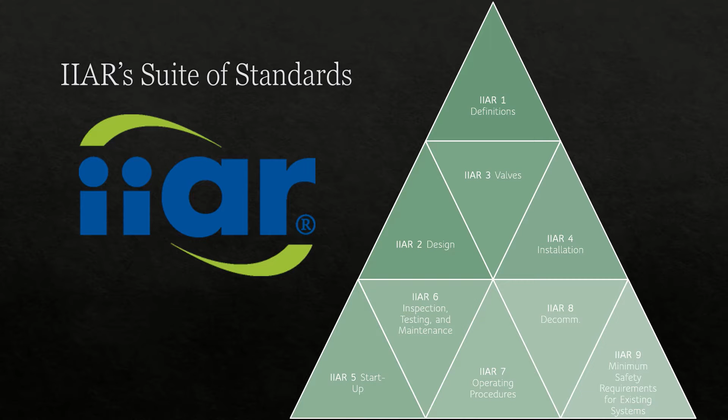The title of Standard 9 is Standard for Minimum System Safety Requirements for Existing Closed-Circuit Ammonia Refrigeration Systems. Like all other IIAR standards, Standard 9 was published to address a specific need in our industry.

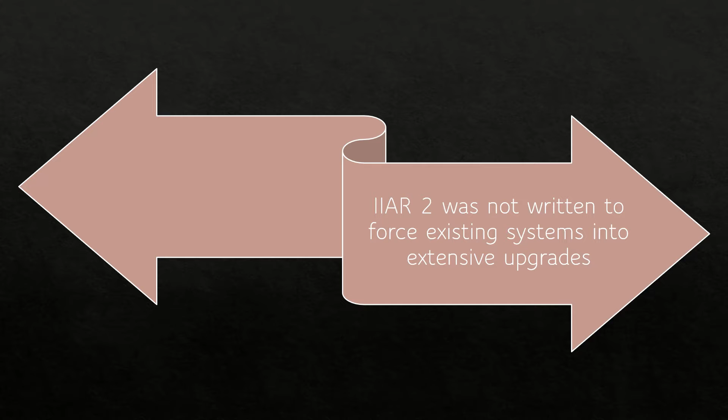The motivation for writing a standard for existing systems was twofold. On the one hand, we wanted to prevent IIAR's design standard, Standard 2, from being used as a regulatory weapon against systems built before that standard was published.

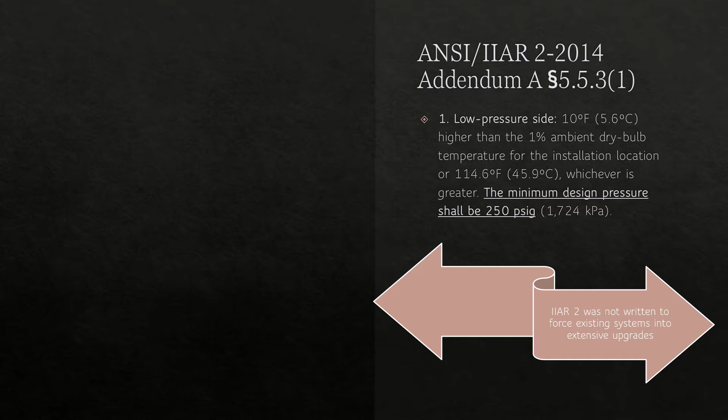For example, the 2014 version of IIAR Standard 2 increased the minimum allowable design pressure of the low side of a system to 250 psi. However, many systems designed prior to that date utilized low side components that were designed for 150 psi. While it was never IIAR's intent that Standard 2 be used to forcibly require extensive upgrades to existing systems, many such instances have occurred.

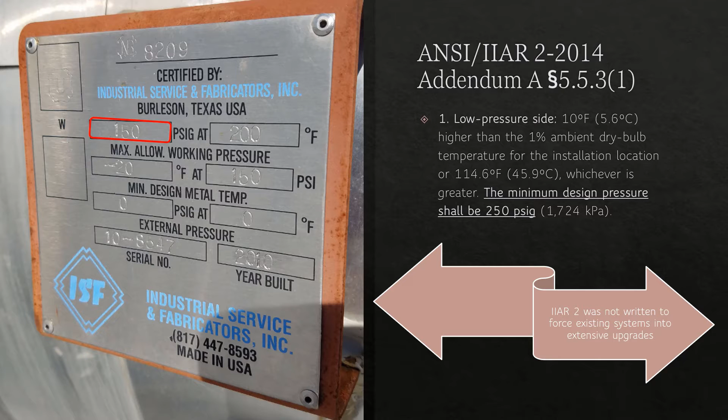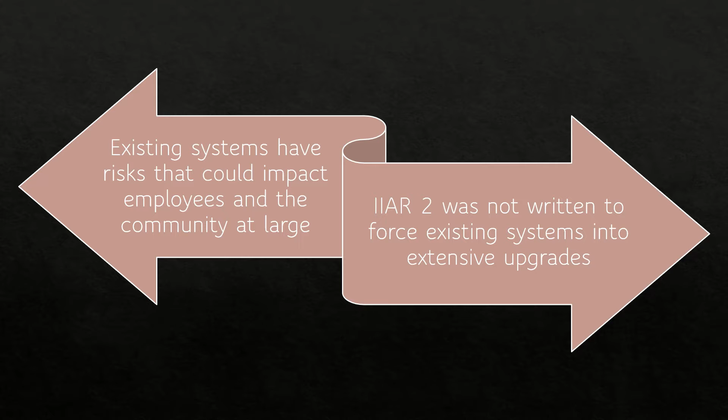On the other hand, as an industry, we acknowledge that existing systems do contain risks that may affect employees and the community at large. In other words, it's unacceptable to use old age as an excuse for doing nothing. IIAR Standard 9 was written to address the tension held by these two perspectives.

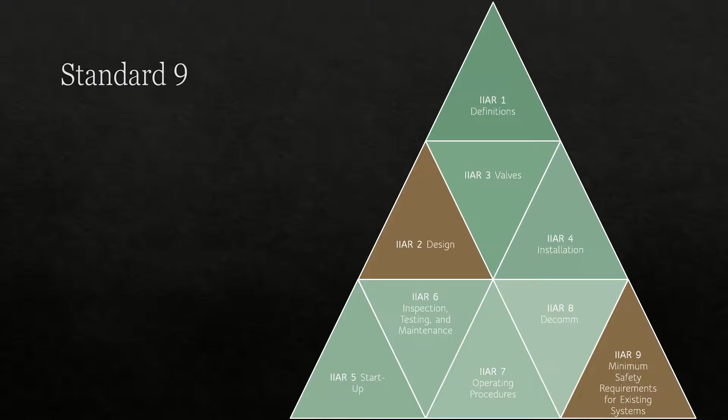A simple way to think about Standard 9 is as a less stringent version of IIAR Standard 2. Standard 9 contains 8 normative chapters and 6 appendices. The normative chapters establish minimum requirements for existing systems and use words such as must and shall. These chapters are intended to be mandatory. The appendices are informational and contain non-mandatory content that complements the normative chapters.

Chapter 7 is titled Minimum System Safety Requirements Applicable to All Systems and contains most of the requirements for existing systems. The biggest implication of this standard is in Chapter 8, which requires systems to be evaluated against the minimum requirements of Chapter 7 within 3 years from the date of publication. Appendix E provides an evaluation template that can be used if desired.

Now I'd like to take a closer look at the details in Standard 9. We'll examine the content in Chapters 1 through 6 and Appendices B, C, and F. While that may appear to be a lot of information, you'll see shortly that these sections contain a relatively small amount of content.

Chapter 1 establishes the purpose and scope of Standard 9. Section 1.1 succinctly states that the purpose of the document is to provide the minimum safety requirements for existing closed-circuit ammonia refrigeration systems. The key word in that sentence is existing. This standard is not applicable to the design or installation of new systems.

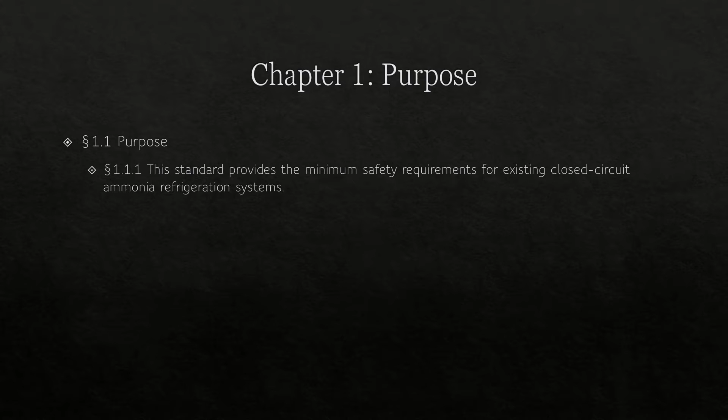Section 1.2.1 summarizes the scope of Standard 9 as providing a method to determine if existing systems comply with the minimum system safety requirements of the standard. Chapter 8 and Appendix E are wholly devoted to this subject of minimum system safety evaluations, so we'll table this topic for now and address it in a later training.

Additionally, the scope of Standard 9 is to provide a method to determine and document that existing equipment designed and constructed in accordance with codes, standards, or practices that are no longer in general use is inspected, tested, maintained, and operating in a safe manner. In other words, IIAR 9 provides a method for our industry to demonstrate compliance with the process safety information requirement in the PSM, RMP, and CalARP regulations.

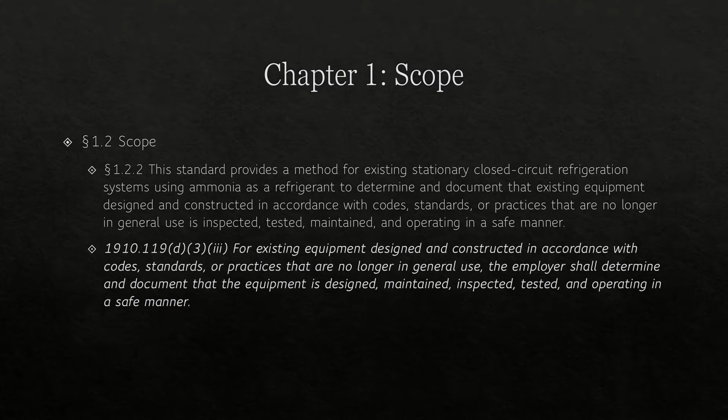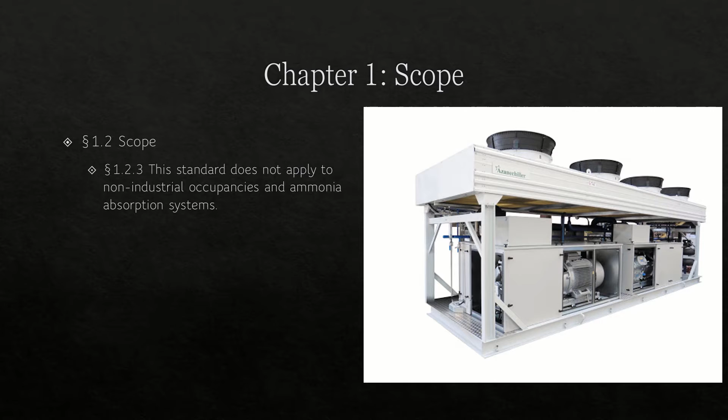Standard 9 is not applicable to equipment in non-industrial occupancies, such as low-charge systems that are now being used in the commercial sector. Additionally, this standard does not apply to ammonia absorption systems.

Chapter 2 is titled Definitions and directs the reader to IIAR Standard 1, which is titled Definitions and Terminology Used in IIAR Standards. The only new definition introduced in Chapter 2 is Risk Ranking Method. But since that definition relates to minimum system safety evaluation methodology, we'll wait to examine it until Chapter 8.

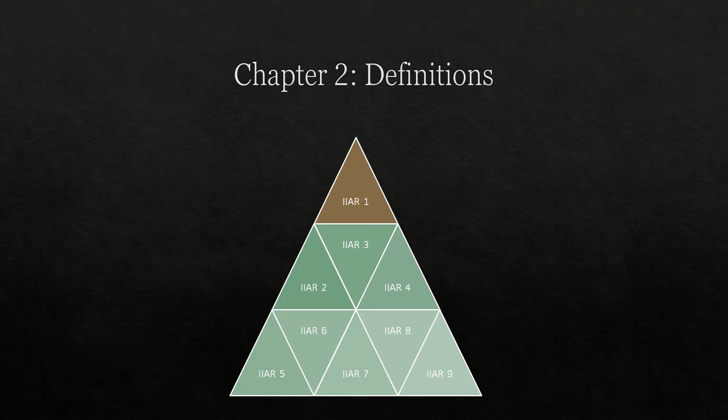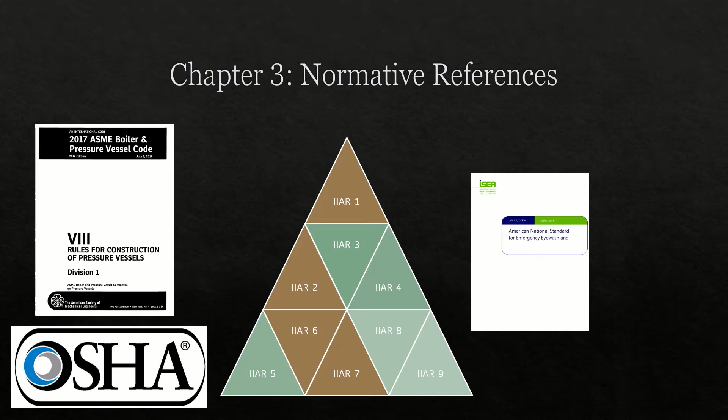Chapter 3 lists the normative references that are part of Standard 9. The documents listed are the ASME Boiler and Pressure Vessel Code Section 8, OSHA's regulations relating to machine guarding, IIAR Standards 1, 2, 6, and 7, the International Safety Equipment Association Standard for Emergency Eyewash and Shower Equipment, and NFPA Standard 704.

Chapter 4 clarifies the minimum requirements for equipment and system documentation. The required documentation is divided into 3 categories: manufacturer data reports, materials of construction, and manufacturer documentation for system components.

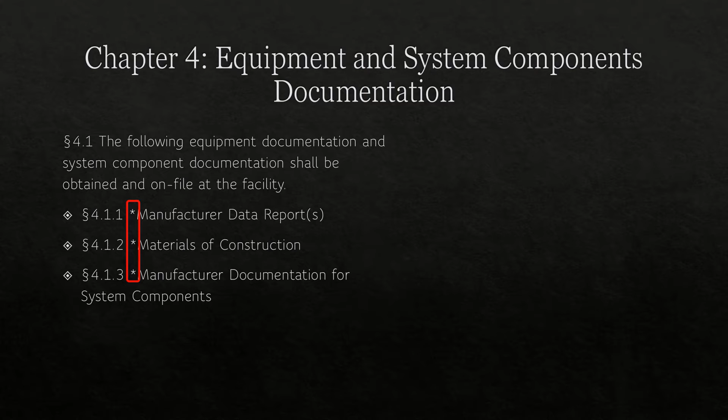You probably noticed the asterisk in each of the 3 categories. Whenever you see an asterisk in this standard, it means there is additional explanatory material regarding that section in Appendix A.

This slide displays the explanatory material for section 4.1.2 regarding materials of construction documentation. As you can see, the first paragraph explains what materials of construction documentation is and even provides a list of common types of materials of construction documents.

The final paragraph has an interesting statement regarding Appendix C. It states that Appendix C provides a listing of additional equipment system component documentation that is not required by this standard to be obtained to demonstrate compliance.

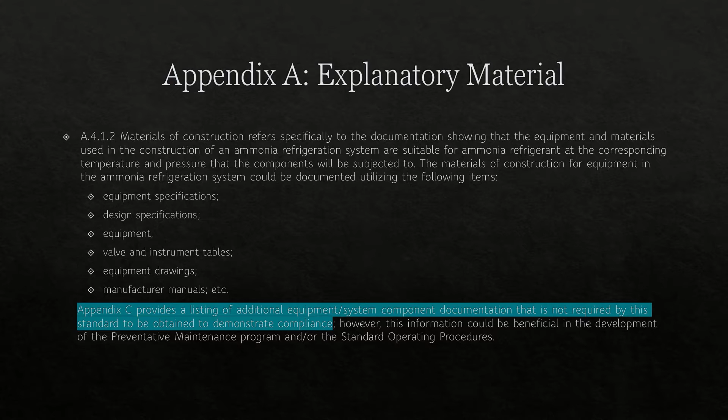Appendix C is located near the end of the document and provides even more background material regarding documentation. The paragraph introducing Appendix C is intentional in clarifying that the appendix is not mandatory. This is true for all the appendices in Standard 9.

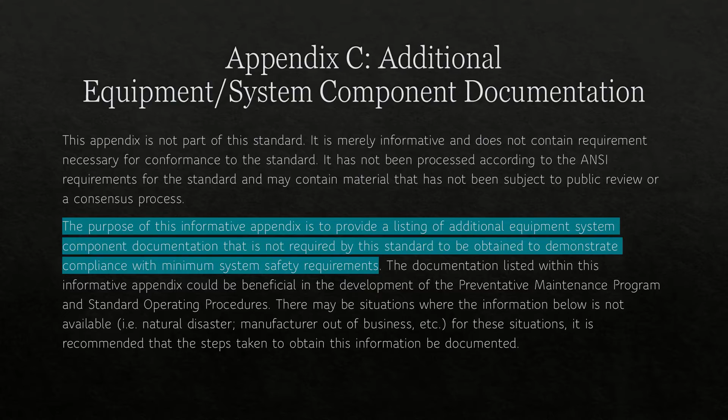The first sentence of the second paragraph explains that the purpose of Appendix C is to provide a listing of equipment documentation that is not required to comply with the standard, but may be beneficial in developing other regulatory documents. The appendix continues by providing a myriad of examples of such documents.

Appendix B is titled Equipment System Component Documentation and serves a very similar purpose as Appendix C. Like Appendix C, Appendix B is merely informative.

Appendix B uses a similar sentence as Appendix C to state that the purpose of the appendix is to list documents that are not mandatory to comply with Standard 9, but are required to demonstrate compliance with other regulatory requirements.

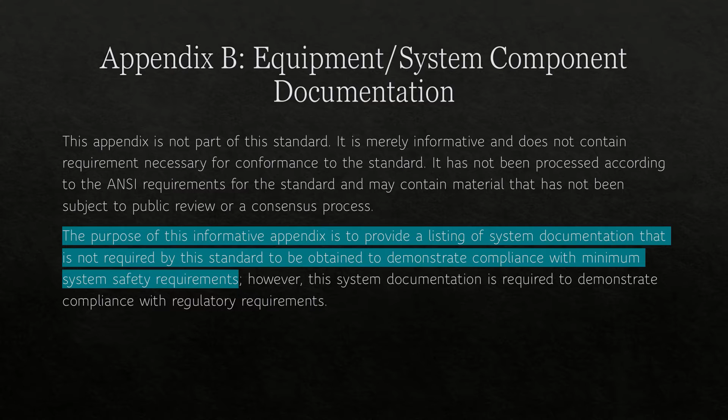Appendix B concludes by listing 10 documents which are required in the RMP, PSM, and CalARP regulations as part of process safety information.

Chapters 5 and 6 are incredibly brief, consisting of 1 sentence each. Chapter 5 requires that equipment and system components be inspected, tested, and maintained in accordance with IIAR's ITM standard, Standard 6.

An interesting nuance of this section is that 5.1 seemingly requires existing systems to comply with Standard 6 immediately, whereas Section 4.1.3 of Standard 6 states that the standard is voluntary until adopted by the authority having jurisdiction or when adopted by the owner, whichever comes first.

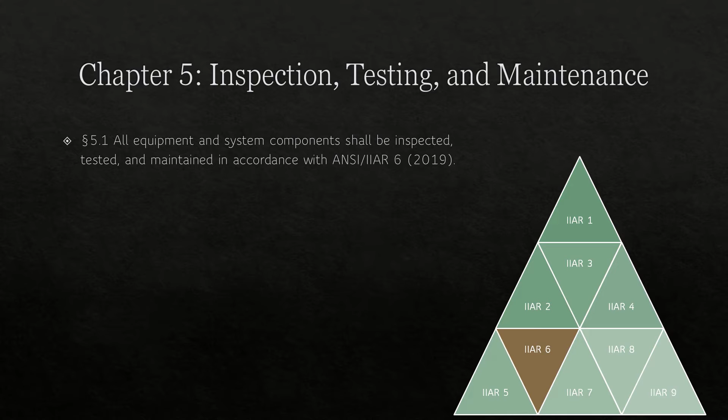We'll have to wait and see how this subtle difference plays out. Chapter 6 requires that existing systems develop operating procedures that comply with IIAR Standard 7.

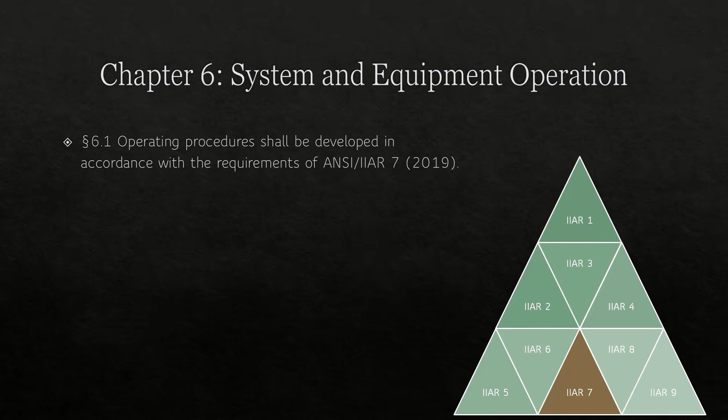Now I'd like to jump ahead and look at Chapter 8. Chapter 8 explains the requirements for evaluating existing systems against the minimum requirements of Chapter 7. Appendix E provides an example of a minimum system safety evaluation that can be used as a template.

You may recall that earlier in the document, the scope of Standard 9 was defined in part as providing a method to determine if existing systems comply with the minimum safety requirements of the standard. Chapter 8 contains the prescriptive requirements for this methodology.

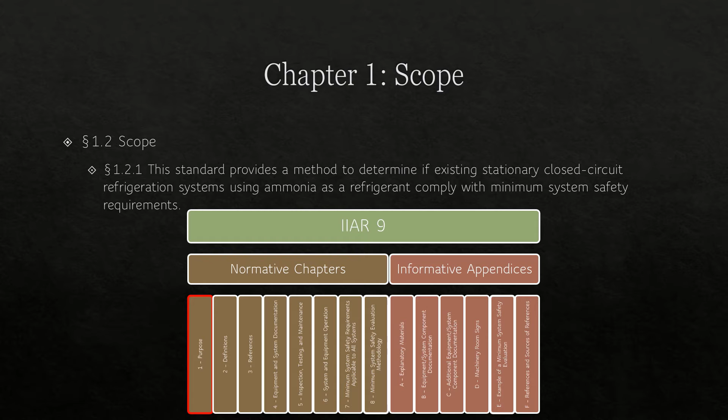Chapter 8 has 3 sections which address requirements, methodology, and frequency. The phrase minimum system safety evaluation is used 9 times in Chapter 8, and therefore it's worthwhile to add another acronym to our vernacular. Moving forward, a minimum system safety evaluation will be referred to as an MSSE.

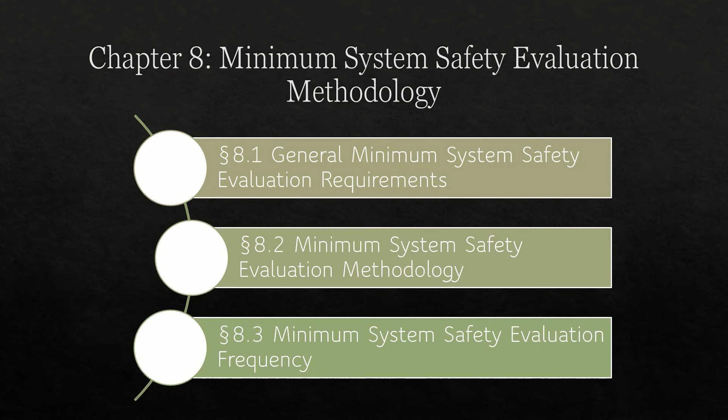The big idea of this chapter is that it is mandatory to perform regular MSSEs to evaluate existing systems against the requirements of Chapter 7 of this standard. Section 8.2.1 prescribes that Standard 9 be used as the measuring stick for existing systems.

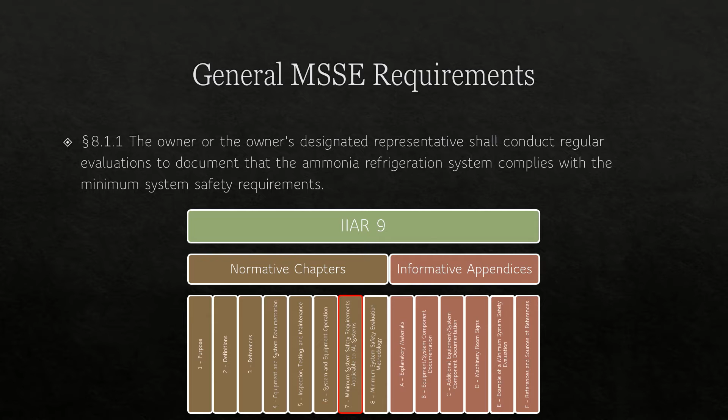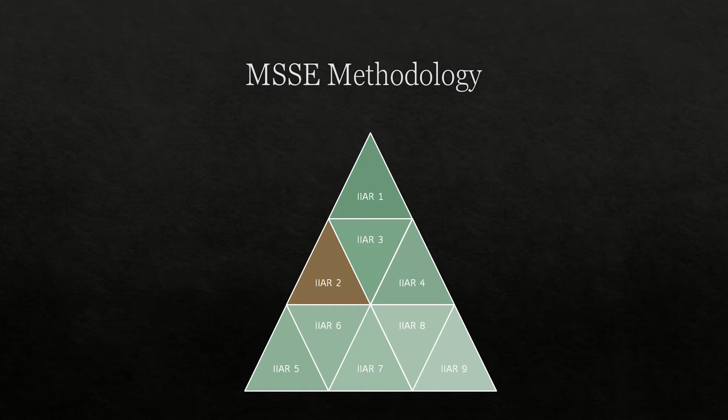New systems, however, should not be evaluated using this standard, and instead should be evaluated using the latest version of IIAR's design standard, Standard 2.

An MSSE must include at least the following aspects: a documentation review, minimum system safety requirements review, and a physical system inspection.

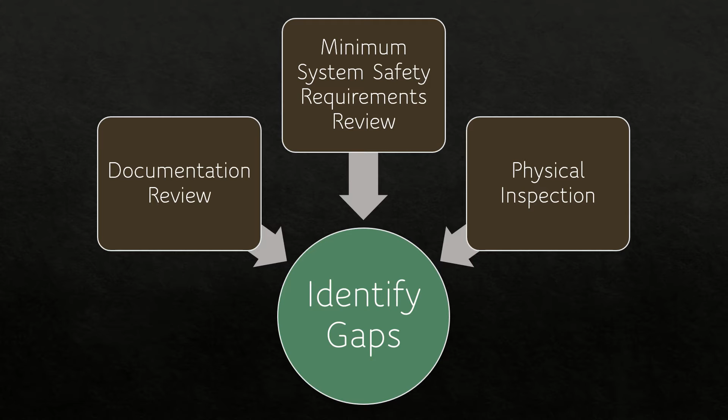The purpose of each of these is to identify gaps which exist between the requirements of Standard 9 and the system configuration. As expected, the results of the MSSE and the procedures that were used to identify gaps must be documented. The documentation must specify the actions that will be taken to address each gap.

When a gap is closed, the documentation should summarize what was done to correct the deficiency. If the facility declines to close an identified gap, further justification is required.

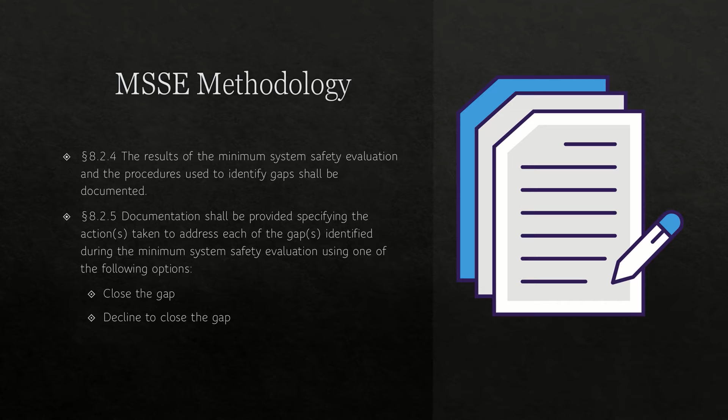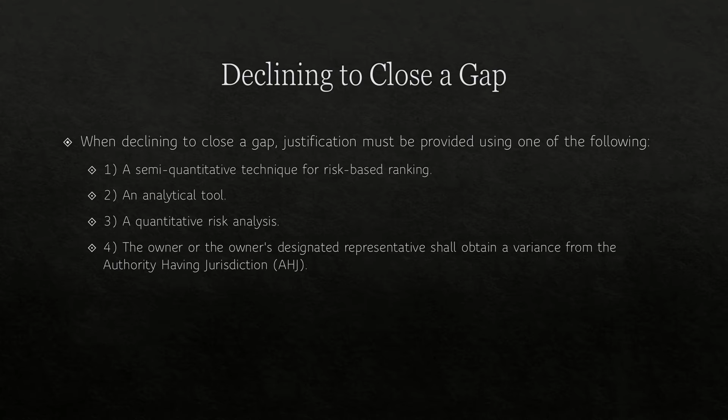Standard 9 lists 4 options to provide justification for declining to close a gap. The options are a semi-quantitative technique, an analytical tool, a quantitative risk analysis, or a variance from the authority having jurisdiction. It is beyond the scope of this video to explore each of these in detail, but Appendix A provides a helpful explanation on each.

An example of a semi-quantitative technique is the What-If Checklist PHA methodology. What-If Checklist PHAs use risk-based rankings which are somewhat subjective, hence the semi in semi-quantitative.

Layer of protection analysis, or LOPA, is given as an example of an analytical tool in Appendix A. According to the appendix, LOPA is a simplified method of risk assessment that provides the much-needed middle ground between qualitative PHA techniques, such as what-if checklist analysis, and a traditional, expensive, quantitative risk analysis, such as fault tree analysis.

Fault tree analysis is an example of a quantitative risk analysis that could be utilized to decline to close a gap. In short, fault tree analysis is a deductive technique that focuses on a particular occurrence of a system or component failure and provides a method for determining the causes of that event.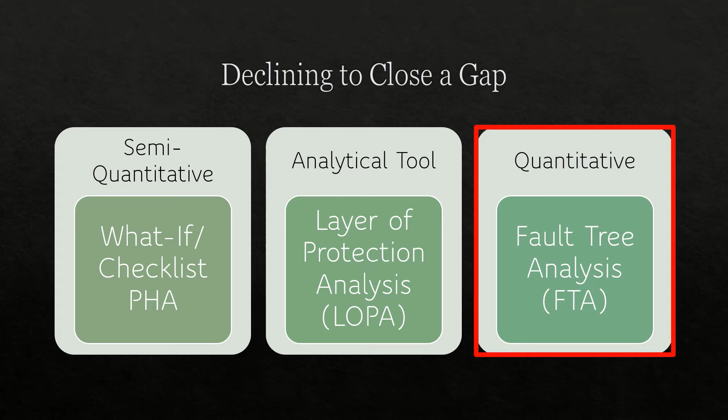Arguably, the biggest implication of Standard 9 is that MSSEs must be performed initially within 5 years of the document being published. This means that the first MSSEs are due in March of 2025. It is expected that initial MSSEs will be revalidated every 5 years. Because MSSEs share the same revalidation frequency as PHAs, Appendix A suggests performing MSSEs in conjunction with PHAs.

Several of the prescriptive requirements in Chapter 8 are also included in Chapter 1. The table on this slide demonstrates the similarities between Chapter 1 and Chapter 8 relative to performing initial MSSEs, revalidation frequency, and methodology.

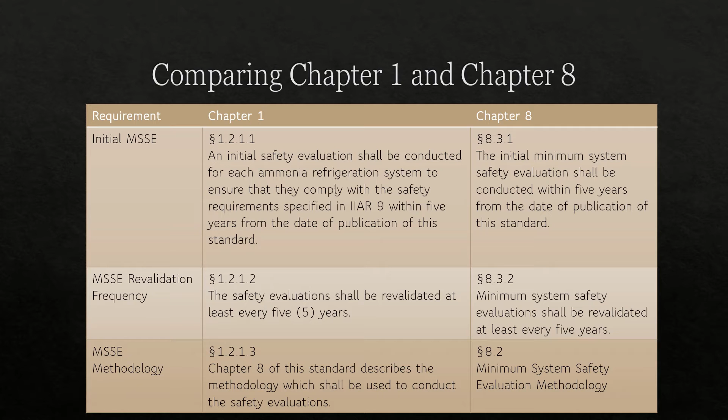Informative Appendix E contains a sample format that can be used or modified to document MSSE findings.

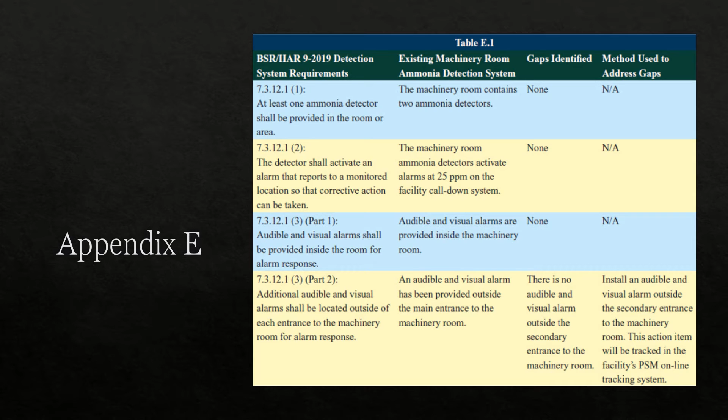We'll conclude our study of Standard 9 with a survey of Chapter 7. Chapter 7 is by far the longest chapter in Standard 9 and contains the minimum system safety requirements that are applicable to all systems, regardless of when they were built.

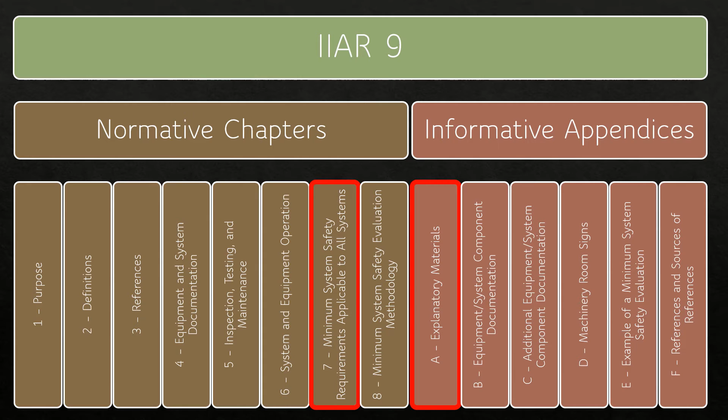Chapter 7 has 4 sections which address location of equipment, general system safety requirements, machinery room requirements, and general equipment safety requirements. We'll start by exploring the requirements in Section 7.1 and 7.2.

Section 7.1 addresses the permissible locations to install ammonia refrigeration equipment. Like Standard 2, Standard 9 expects that refrigeration machinery will be installed inside a machinery room. However, Standard 9 allows for several exceptions.

First, equipment may be installed outdoors. Second, select equipment may be installed in other than machinery rooms. Examples of such equipment are evaporators, condensers, low probability pumps, valves, and any ammonia refrigeration system or portions thereof with a total connected compressor drive power not exceeding 100 horsepower.

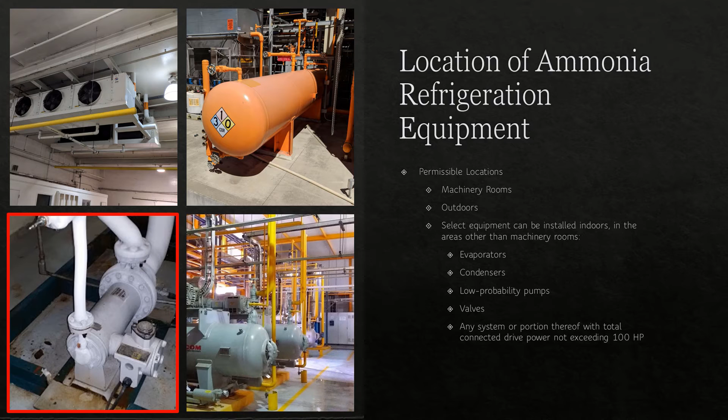Section 7.2.1 prescribes the purity requirements for ammonia used in a refrigeration system. The purity specified in Standard 9 matches Standard 2 for new designs and must have an ammonia content of at least 99.5%. Contaminants must be limited as specified in the table on this screen.

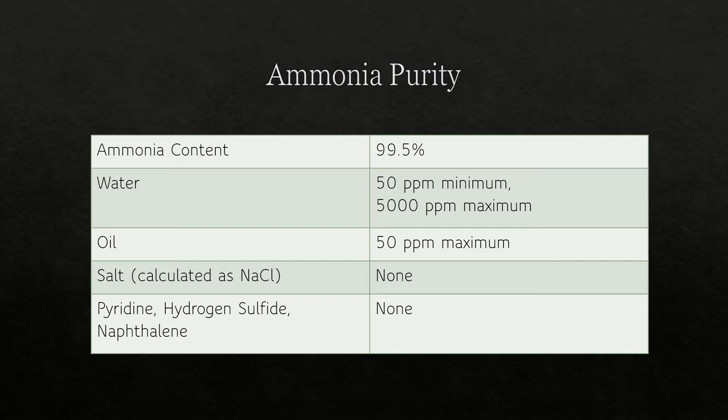Section 7.2.2 addresses the minimum pressure ratings that are acceptable for existing systems. As the table illustrates, Standard 9 is more lenient than Standard 2 in allowing the low side design pressure to be 150 psi, as opposed to 250 psi in Standard 2.

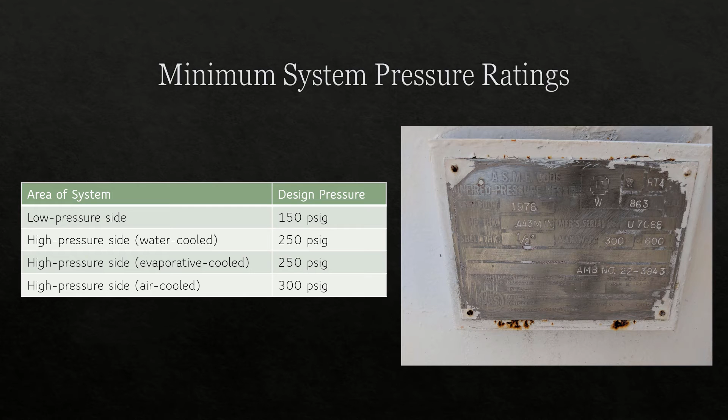While it should go without saying, Section 7.2.3 requires that existing equipment be rated to operate within the full range of temperatures associated with the system rating and for the full range of ambient temperatures to which the equipment will be exposed. You can determine the maximum and minimum temperature ratings for a vessel by reviewing its data report.

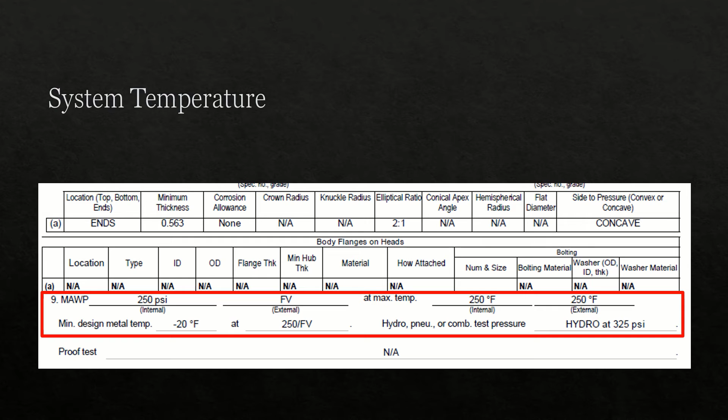Section 7.2.4 requires that systems be configured with a means to remove air and other non-condensable gases from the refrigeration system.

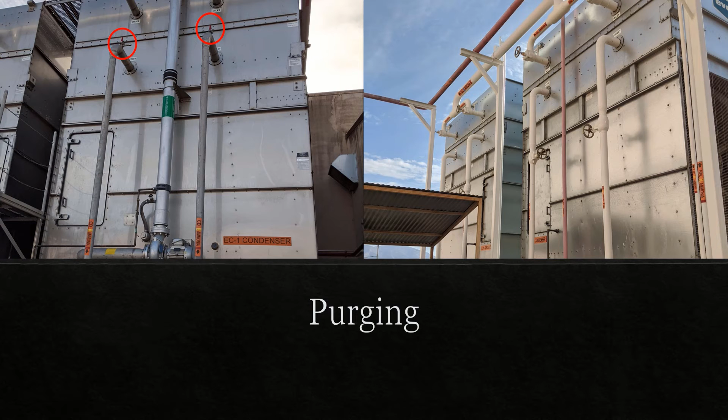Typically, condensers are configured with purge valves on the condenser drain piping to facilitate purging of non-condensable gases, as shown in the picture on the left. Occasionally, however, you'll run across a system lacking these valves, as depicted in the image on the right.

Section 7.2.5 addresses oil management and requires that provisions be made for removing oil from locations in piping and equipment where oil will accumulate. Specifically, it requires that compressors be configured with a means to sample oil for periodic analysis and that oil removal be accomplished by one of 3 approved means.

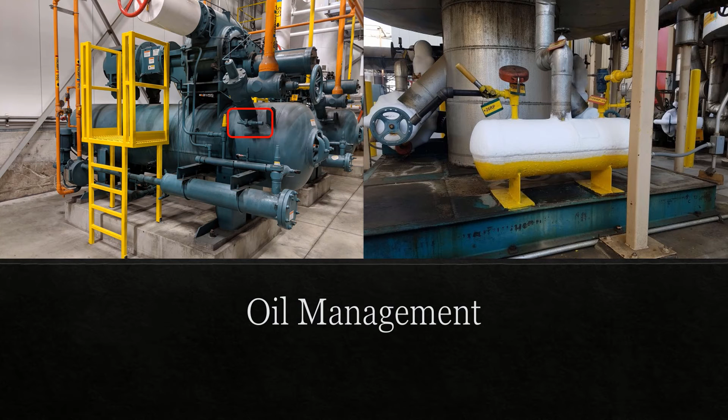At minimum, a shutoff valve in series with a self-closing shutoff valve is required. Appendix A clarifies that oil draining valves and piping can be either permanently installed or temporary. Either is acceptable. Standard 9 requires that piping and equipment surfaces not intended for heat exchange be insulated, treated, or

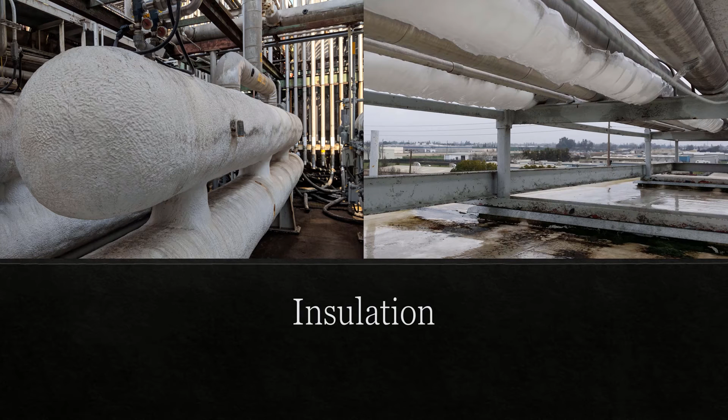otherwise protected to mitigate condensation and excessive frost buildup. This section exempts valves and other equipment from requiring insulation where insulation would restrict access to the component. Also, pipes and fittings constructed of corrosion-resistant materials or protected with a corrosion-resistant treatment need not be insulated so long as they are routinely defrosted to limit ice accumulation.

Section 7.2.7 requires that piping, tubing, and equipment be supported to prevent excessive vibration and movement. Section 7.2.8 addresses service provisions and requires that equipment be accessible for inspection, testing, maintenance, and emergency shutdown.

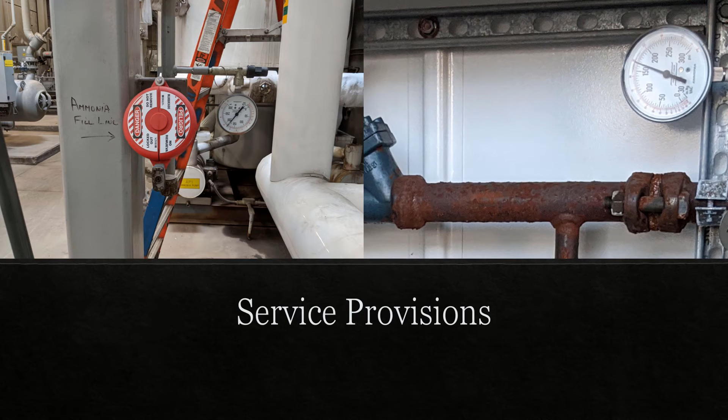Charging connections must be plugged or capped when not in use. If located outdoors, the connection must be locked or otherwise restricted to access by authorized personnel only.

This section ends by laying out the requirements for pressure gauges on the high side of the system. They must display at least 120% of the design pressure, and this section also requires that equipment have isolation valves for service and a means for pump out.

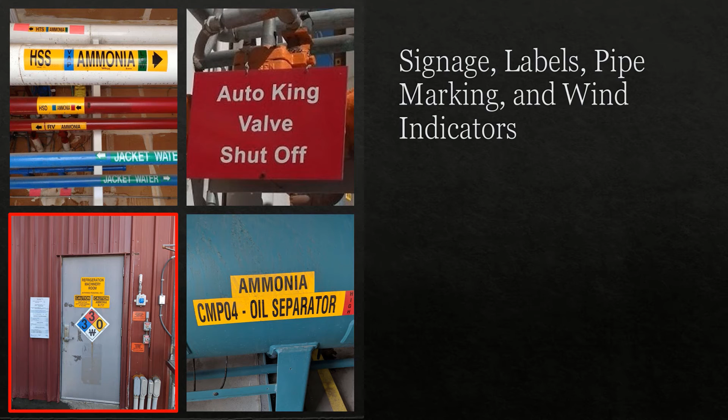With regard to signage and labeling, Standard 9 closely matches Standard 2. Machinery rooms must be equipped with NFPA 704 placards, alarm signage, and restricted access signage. Equipment must be provided a label indicating the equipment ID number.

Valves intended for emergency shutdown must be clearly and uniquely identified at the valve and on schematic drawings. And finally, all pipes must be labeled.

Section 7.2.10 states that it is the duty of the person in charge of the premises to provide directions for emergency shutdown that are readily available. This information must include details and steps for shutting down the system in an emergency, name and telephone numbers for operating and maintenance staff, names and numbers of government agencies that must be notified of a release, quantity of ammonia in the system, and emergency facility contact information.

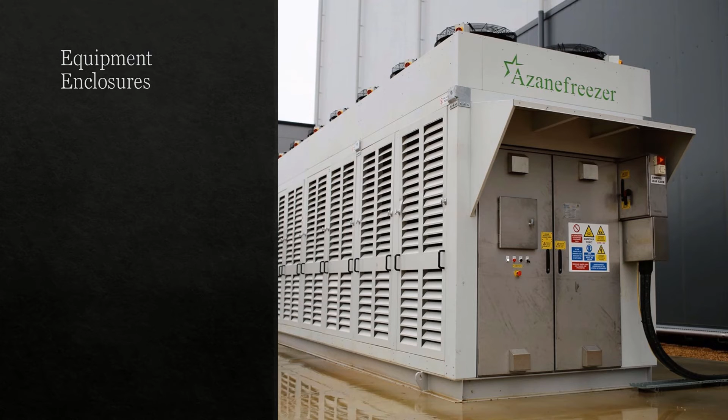Where used, equipment enclosures must be provided with protection from physical damage and equipped with panels or doors as needed to operate and maintain the equipment.

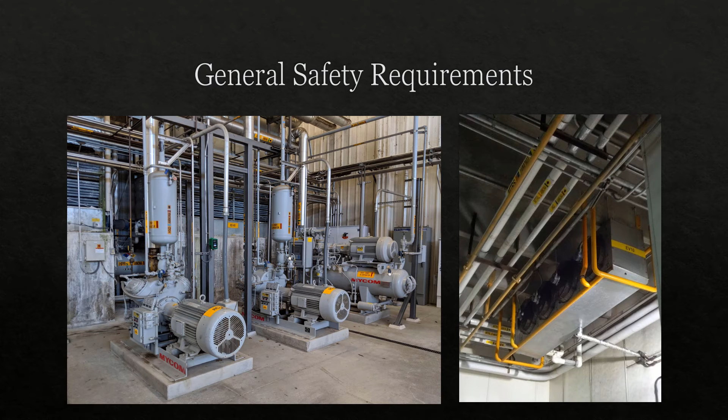Section 7.2 concludes by addressing some general safety requirements that are applicable to all equipment, regardless of age. For example, any equipment subject to physical damage must be guarded or barricaded, and equipment with moving parts must be protected by screens or guards in accordance with OSHA rotating machinery regulations.

Continuing on, let's consider the requirements of Section 7.3.

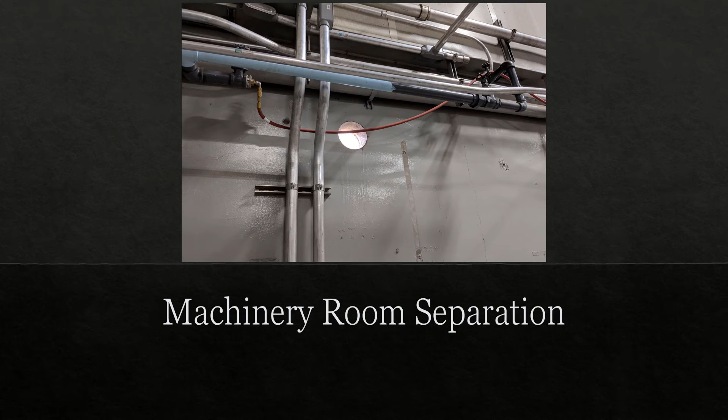Relative to machinery room construction, Section 7.3.2.1 requires that the machinery rooms be separated from other portions of the building by tight-fitting construction. The unsealed hole in the wall in this picture is prohibited by IIAR Standard 9.

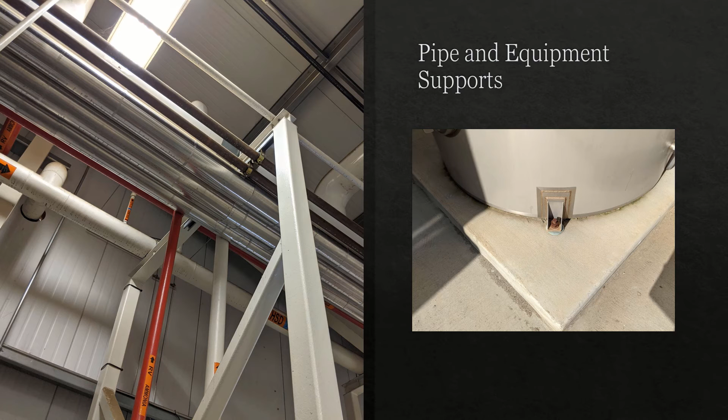Pipe and equipment supports must be adequate and designed to carry the weight of the equipment, ammonia inside the equipment, and insulation. Standard 9 indicates that where necessary, sway bracing and vibration control are required, but the document does not specify what circumstances would make bracing necessary.

Valves referenced in emergency shutdown procedures, such as king valves, must be directly operable from the floor or chain operated from a permanent work surface.

Section 7.3.3.4 requires that access to machinery rooms be restricted to authorized personnel only. Informative Appendix D includes an example of how to label a machinery room door.

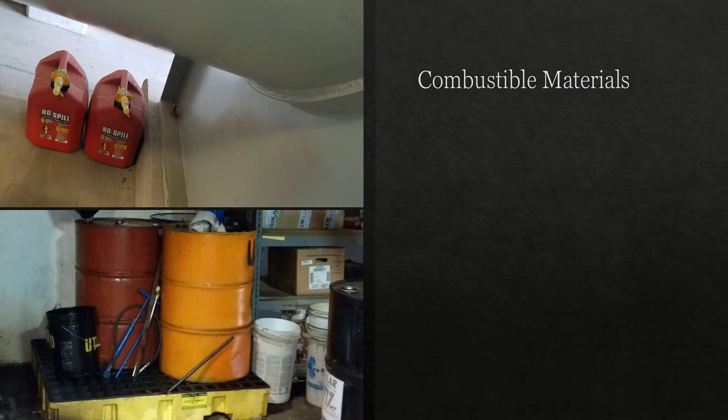Standard 9 prohibits the installation of fuel-burning appliances and equipment with surface temperatures above 800 degrees Fahrenheit inside machinery rooms. Exceptions are made if the combustion air is ducted from outside the machinery room or if the equipment is interlocked with ammonia detection. Internal combustion engines powering ammonia refrigeration compressors are permitted to be used in a machinery room.

All ammonia pipes must be labeled. The label must include the word ammonia, the physical state of the ammonia in the pipe, the relative pressure level in the pipe as being low or high, the pipe service, which is typically an abbreviation, and the direction of flow.

Ammonia cylinders must not be connected to the refrigeration system unless in the process of being transferred from a cylinder into the system. Standard 9 matches the requirements in Standard 2 for eyewash and safety showers.

Each machinery room must have access to a minimum of 2 eyewash and safety showers, one inside the room and one outside the room. Additional units are required to ensure the path of travel in the machinery room to an eyewash and safety shower is no more than 55 feet.

Eyewash and safety showers installation must adhere to ANSI ISEA Z358.1.

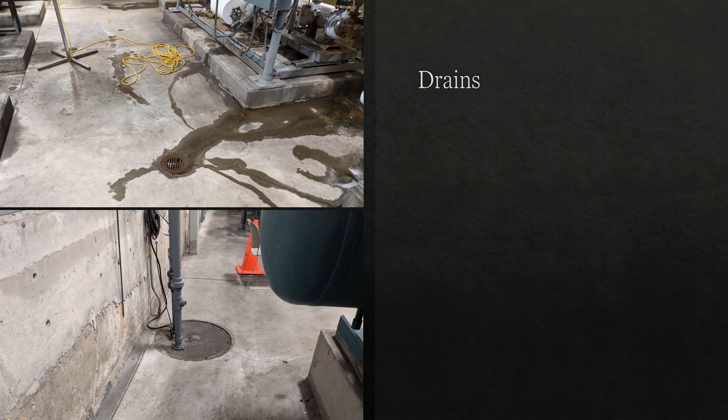Standard 9 prescribes that floor drains or other means be provided to dispose of liquids. The term other means is not defined, leaving quite a bit of flexibility to achieve compliance.

Section 7.3.9 requires that machinery rooms exceeding 1,000 feet squared have at least 2 exit doors. Appendix A provides explanation that where installing a second door is impractical, the owner or operator should provide an alternative escape method, such as the use of escape equipment.

Machinery room doors must be self-closing, tight-fitting, equipped with panic hardware, and swing in the direction of egress.

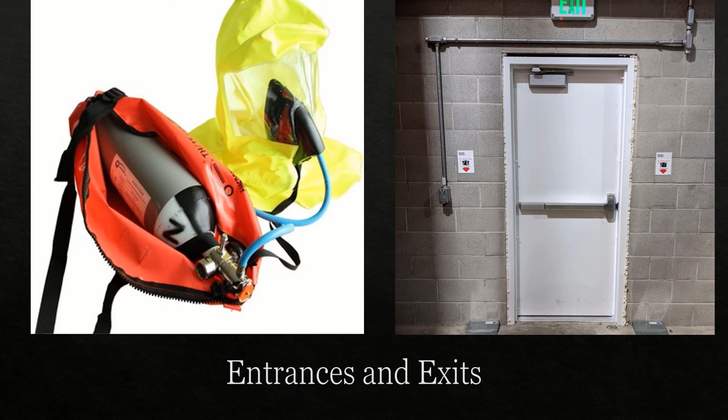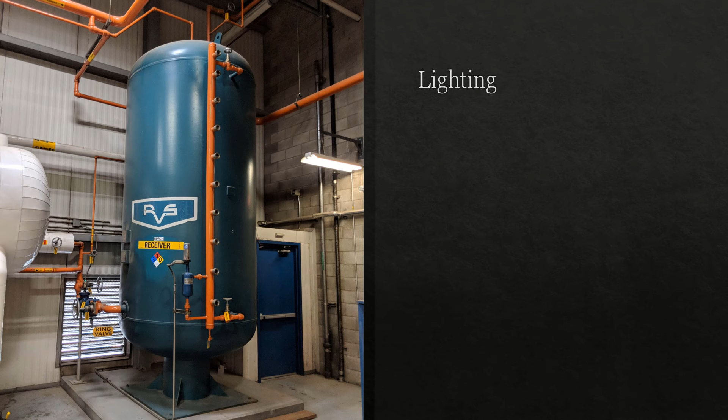Section 7.3.10 requires that machinery rooms be equipped with light fixtures which can deliver a minimum of 30-foot candles at 36 inches above a floor or platform. There are numerous smartphone apps that can be used to measure the light intensity inside a machinery room.

Existing facilities must have an emergency stop switch and ventilation switch located outside the principal machinery room door. The e-stop must provide off-only control of compressors, ammonia pumps, and normally closed automatic valves located inside the machinery room.

The ventilation switch must provide on-auto override capability for emergency ventilation. An emergency ventilation switch is not required if the ventilation system runs continuously at the emergency ventilation rate. Both switches must be protected by a tamper-resistant cover and clearly marked by signage near the controls.

IIAR 9 requires that existing machinery rooms be provided with ammonia detection and alarms. At least one detector must be installed. The alarms must report to a monitored location if the concentration reaches 50 parts per million so that corrective actions can be taken. If the concentration reaches 1,000 parts per million, emergency ventilation must be activated. The refrigeration machinery room equipment must be de-energized if the concentration reaches 40,000 parts per million.

Standard 9 specifies that audible and visual alarms are required both inside and outside the machinery room. There is no requirement in Standard 9 to provide detection outside the machinery room, although Appendix A warns that ammonia detection may be required in areas other than machinery rooms by the building code, fire code, or mechanical code in effect at the time of installation.

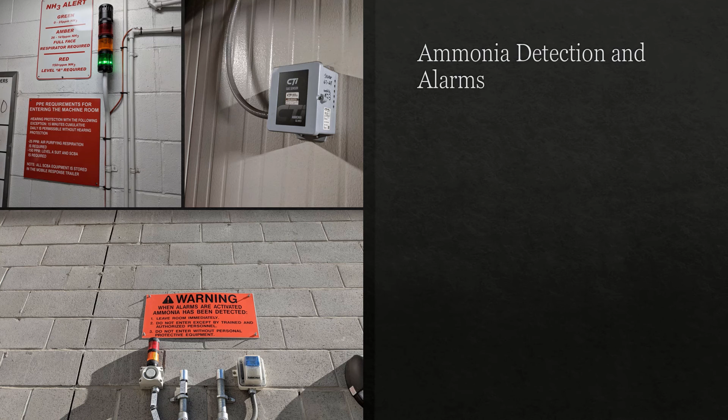Section 7.3 concludes by addressing machinery room ventilation. At minimum, existing machinery rooms must be provided with occupancy ventilation and emergency ventilation. IIAR 9 does not specify the required ventilation airflow rates, but rather requires compliance with the codes and standards in effect at the time of construction or modification to the machinery room.

Other ventilation system requirements include: the system must be automatically activated if the ammonia concentration reaches 1,000 parts per million; fan blades must be non-sparking; fan motors in the airstream must be totally enclosed; a monitored location must be notified if the ventilation system fails; makeup air must prevent short-circuiting, be uncontaminated, and serve only the machinery room; and where utilized, motorized louvers must fail open.

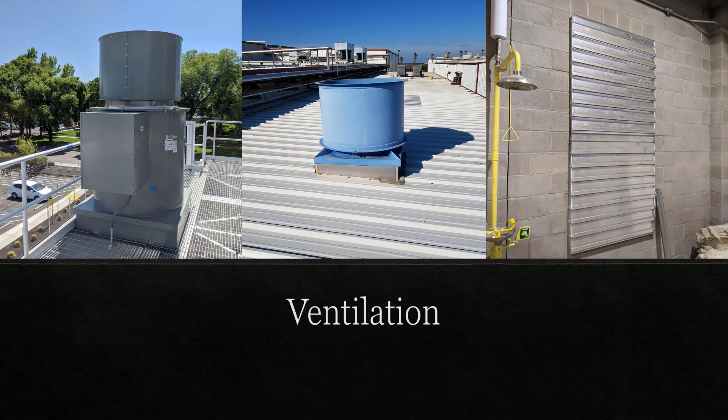To finish up our study of Standard 9, let's look at the requirements of Section 7.4. Standard 9 requires that ASME vessels and heat exchangers be protected from overpressure with an ASME relief device.

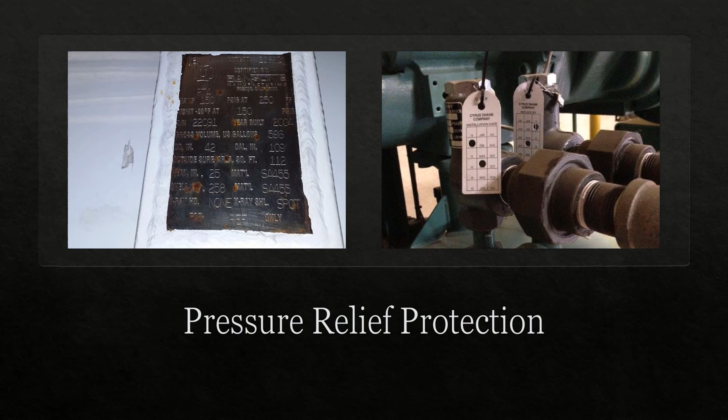While Standard 9 does not include prescriptive requirements for sizing relief valves or termination piping, it does mirror Standard 2 in requiring that relief valves terminate to atmosphere at least 15 feet above grade and 20 feet from a window, ventilation intake, or exit door.

If the termination point is on the roof, the termination height can be reduced to 7.25 feet if that roof is occupied solely during service and inspection. This same requirement is applicable to platform surfaces, such as condenser platforms.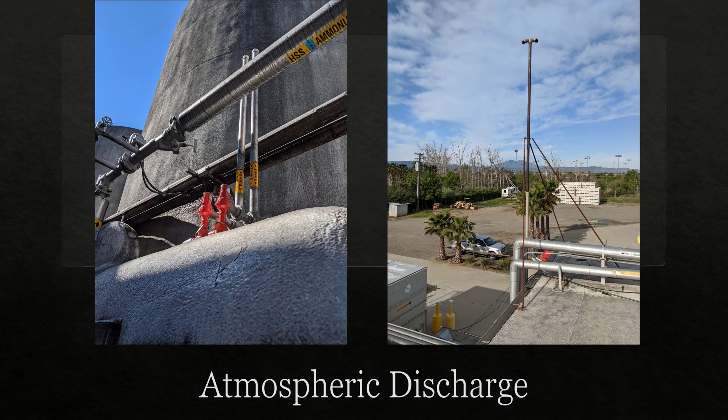IIAR 9 requires that relief valve piping be configured with provision for draining moisture from the piping. Where a liquid can be trapped and cause overpressure due to thermal hydrostatic expansion, overpressure protection must be provided. The images on this slide illustrate two different types of hydrostatic relief devices.

Standard 9 requires a hydrostatic relief device when liquid can become trapped in any of the following scenarios: 1. Automatically during normal operation. 2. Automatically during shutdown, including an alarm or power failure. 3. During planned isolation for standby or seasonal conditions. 4. Due to an equipment fault. Or 5. Refrigerant pumps and connected piping must have a means of protection from hydrostatic overpressure.

IIAR 9 clarifies that if hydrostatic expansion is only possible during maintenance or service operations, administrative controls are acceptable in lieu of a relief device.

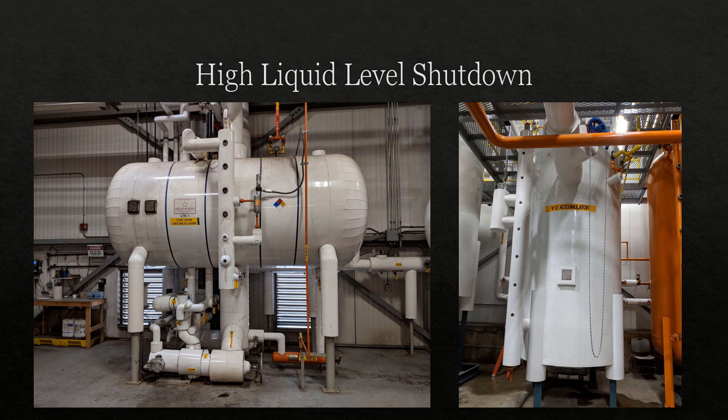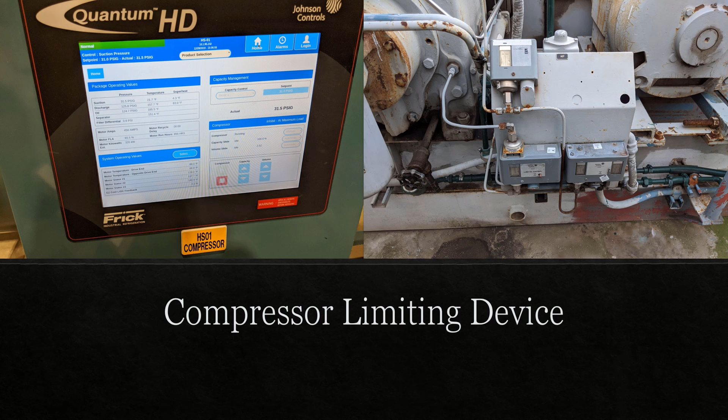Section 7.4.4 requires any vessel connected directly to a compressor suction line to be equipped with a high liquid level control to cause the compressor to shut down if high liquid level is detected in the vessel. Similarly, Section 7.4.5 requires compressors to be configured with a high discharge pressure limiting device, often called a high pressure cutout, to shut down the compressor when the safe range is exceeded.

The location of ammonia piping is restricted in Section 7.4.6. Piping must not obstruct a means of egress. Piping must not be placed in a shaft containing a moving object, such as an elevator. Piping must not be in a means of egress that is enclosed and accessible to the public. Piping can be installed underground so long as it is protected from corrosion. And finally, where piping is installed in concrete floors, it must be encased within a pipe duct.

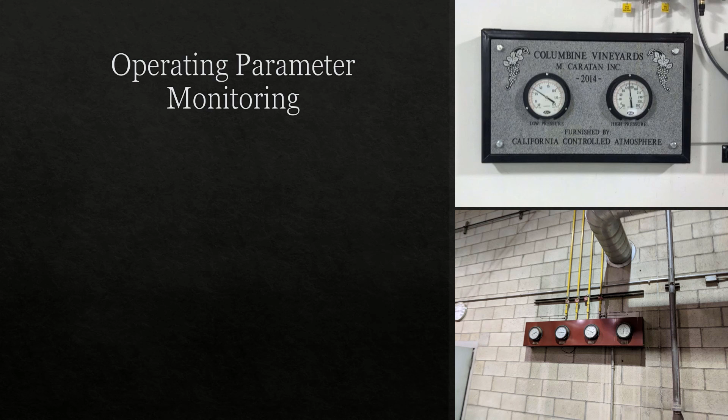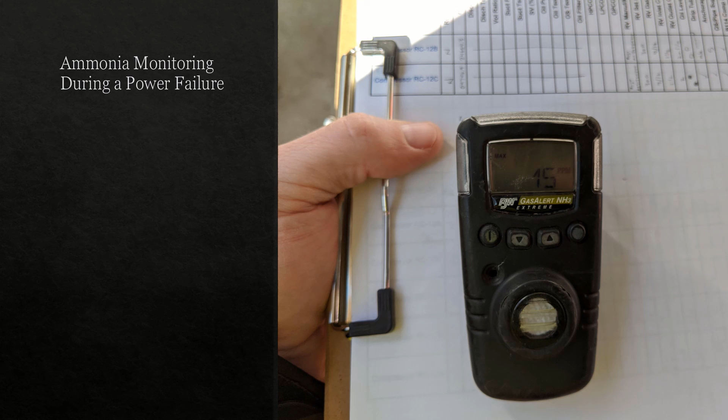Standard 9 requires instrumentation and controls to be provided to indicate the operating parameters of the refrigeration system and equipment. Standard 9 matches Standard 2 in requiring facilities to have a method of monitoring the concentration of ammonia during a power failure. Appendix A suggests that a portable ammonia detector is an acceptable means to adhere to this requirement.

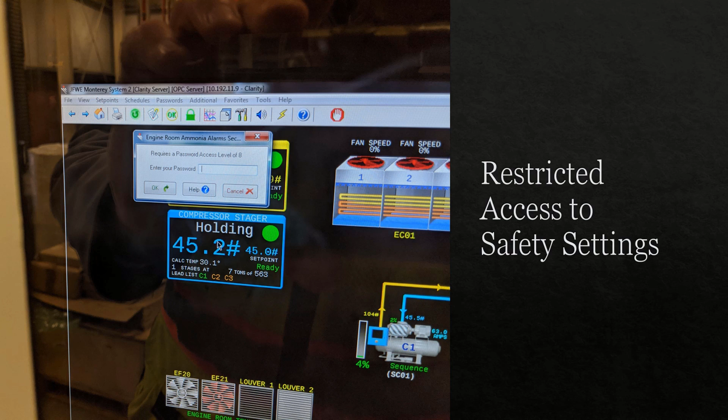Refrigeration system safety settings must be limited to authorized personnel only. This is often achieved through password protection on a PLC HMI. Any instruments and visual level indicators must have a maximum allowable working pressure equal to or greater than the system in which they are installed.

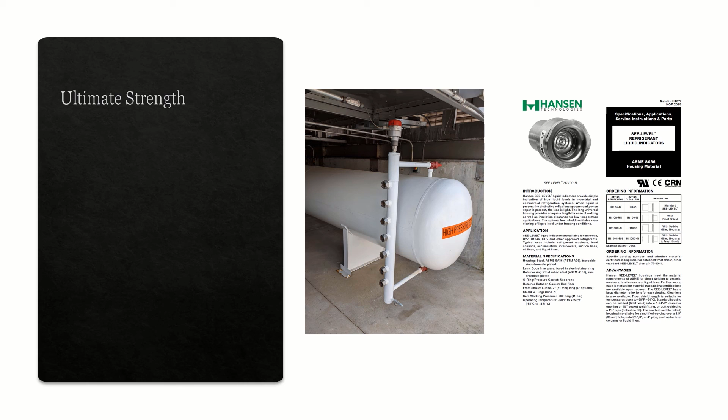Section 7.4 concludes by addressing visual level indicators. First, sight glasses must not be installed where risk of hydraulic shock exists. Second, all level indicators must be protected from physical damage. Third, with the exception of a bullseye column, linear level indicators must be fitted with internal check-type shutoff valves and have protection against accidental breakage of the glass tube from any direction. And finally, when bullseye sight glasses are used, they must be compatible with ammonia and sized for the intended application.